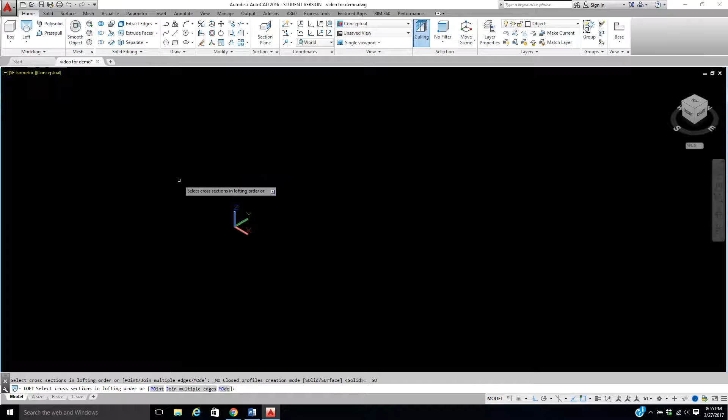All right, we're going to do another part over on this modeling panel. We've already done our extrude, and the next one down is loft. What loft is, basically, if you look at the picture, you're going from one plane up to another. It doesn't always have to be a circle to a circle, it could be a different shape. So we'll do a couple of those.

Let's go ahead and do a couple of these real quick. Let's take just a rectangle, and do a rectangle here. And let's go ahead and take a circle over here.

Okay, now these are on the same plane. We're going to do two different ones so you get the idea. Those were both drawn in the world, or on the top, looking down. Now we need to draw something coming up, since this plane is set down here. We need a higher plane so it actually will loft up to it.

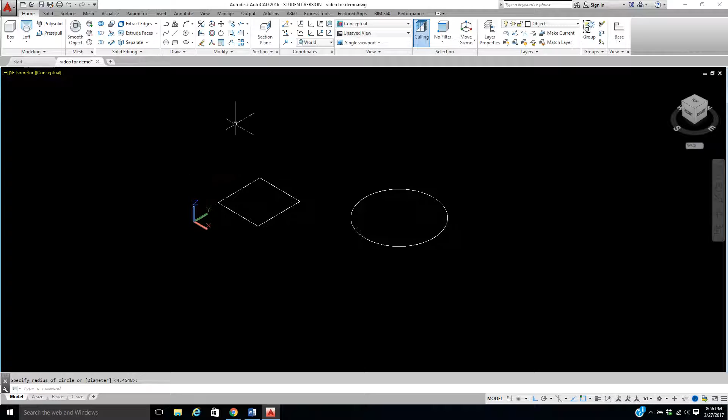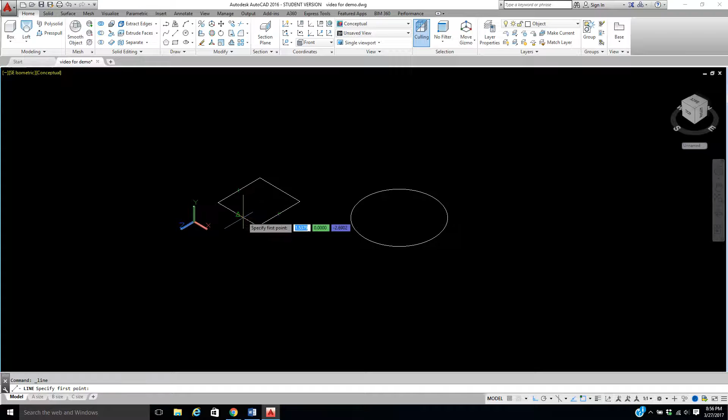So with that, I'm going to change, and go to the front. I could go to the right, the left, or the rear, but I'll just go to the front, it's easy enough. I'm going to take my line command and have my tracking on so I can find the center right here. So I'm going to pick this area and draw my line straight up.

That seems high enough. And while we're here, we're going to do the same thing here, just bring this up. So you see, this is going to go from a square or rectangle up. This is going to go from a circle up.

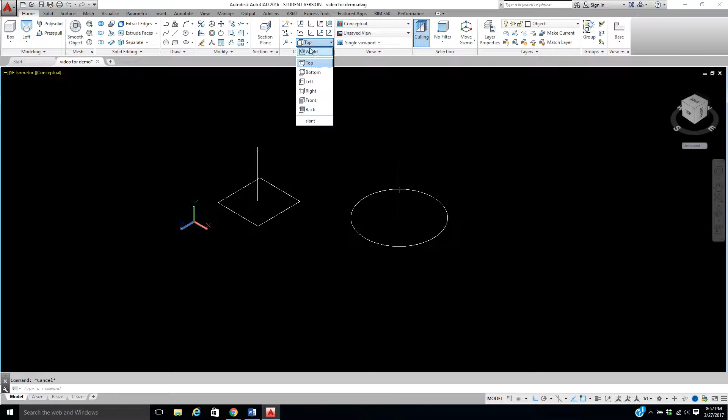Let's put a circle on this one so it actually has to think through some crazy geometry. Okay, before I can put that circle, I need to move this UCS. Let's go ahead and go back to the top, or the world, which I can't do while I'm in a command. So let's go here and see how it flipped back over. And let's come in and take our circle.

Let's go ahead and do another circle on top of this one so you can see it. Now remember when we did the one that was the extrude and the taper? Sometimes it's easier, if you know your beginning point and your ending point, to draw something like this instead of worrying about the angles, but that's your choice.

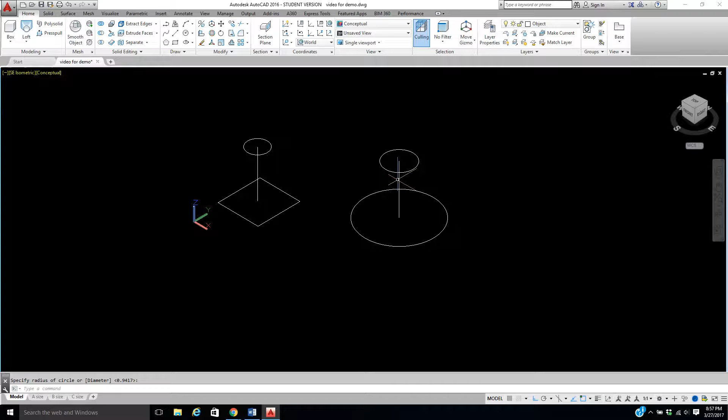Now these lines here, they're really not necessary. They could have been done on the zero layer so they're not printing in our classroom anyway. So if you take a look at that, let's go here and see what it looks like in the front. See how you've got one level to another? That is one plane, that is one plane. So you can see how that works.

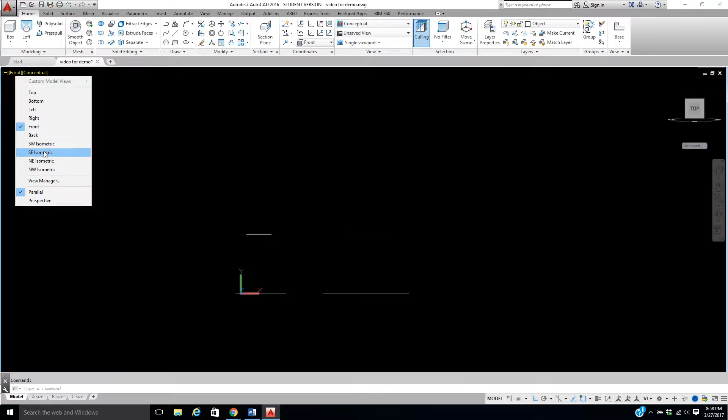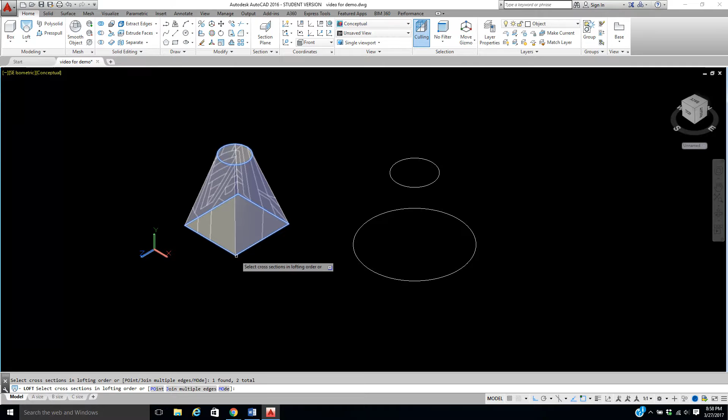So now let's loft this. Zoom in and let's take loft. We're going to pick our item and then pick our item. It's first coming in almost like X-ray vision to make sure that's what you want. Now notice there are some other things here, like point, where you can actually pick a point, and then this circle would only come down, loft down to just this point if you wanted that. There's multiple edges you can use on that — that takes some playing around. But if this is what you want, and this is what it looks like, you just right click and enter again.

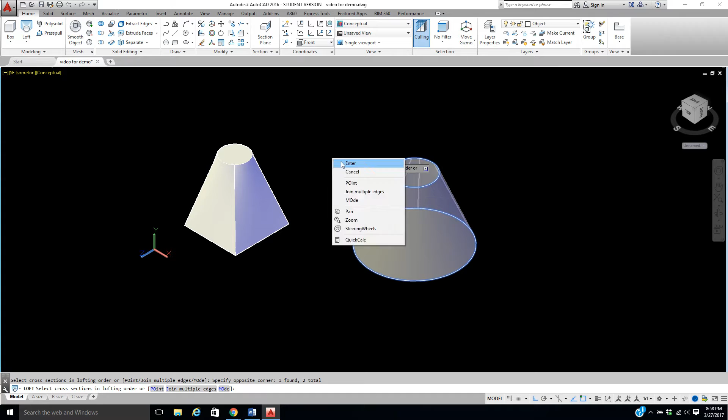And now it's locked in place. We can do that again with this loft and go from a circle to a circle, and make sure it's all set. And we're good to go.

That's all there is to loft. Remember, you've got to have your base down here in one UCS, draw your straight line up in your next UCS, and then back to your other UCS again. So you're flipping your UCS a few times, but loft is really fun. It's easy to use once you get used to it. So hopefully that one will help.